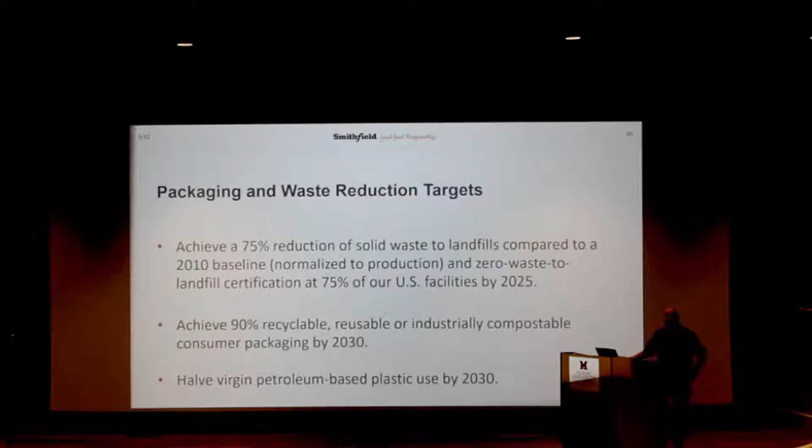We have others with food loss and waste reduction. We've got others with greenhouse gas emission reduction. We've got huge programs for a lot of different things, but we're going to talk about our zero waste to landfill program today. So how do you get there? Like, what's the process? What does it mean to be zero waste to landfill?

So we define it internally that you don't send anything to landfill for 12 months in a row. So it can't be just 1 month and go back to putting stuff into the landfill. It's got to be a sustained program, and we audit it every month, and we make sure that we fulfill that. Minimum 10% reduction in total waste from our baseline, recycle or reuse greater than 50% of the waste,

and the total cost basically has to be cost neutral. It can be a little bit above, 5% above what the baseline cost is, but effectively it has to be cost neutral. So, when did we start this whole thing? We started basically out in 2012. We came up with the thought process of having one zero waste to landfill facility by 2018.

And this is actually in Peru, Indiana. So anybody from Indiana? Couple, there you go. So that's great. And so Peru is just north of Indianapolis, north of Kokomo. And they took the initiative and became our first zero waste to landfill facility.

And then after that, again, by 2018, we wanted one. We had 12 facilities by 2018. And right now we have 21 of our 45 or so operating facilities, 50 if you include distribution centers, zero waste to landfill. So we're really making a mark, you know, relative to our peers in the industry. Yeah, we're miles ahead of them.

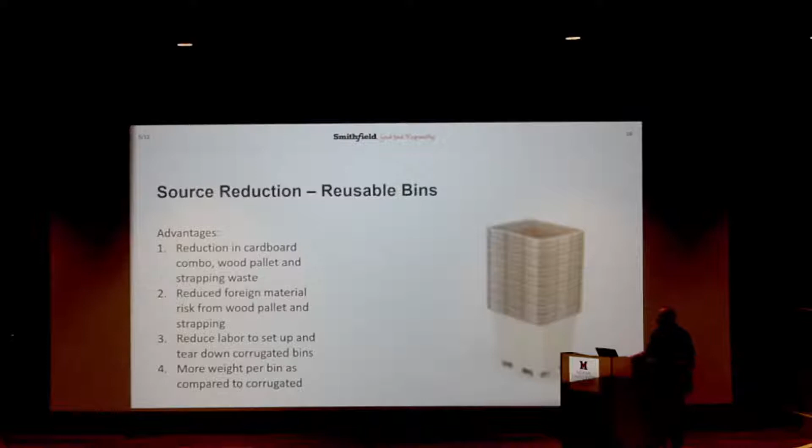You don't need the strapping around it. So it's fully self-contained. And then the other part of it is make it easier for people to do the right thing than the wrong thing, right? To put it in the right place to be recycled versus putting it in the wrong place and have it go to the landfill. So we try to do that at our operating facilities throughout the US, and again, we have it in different languages, right? And we have to try to do pictures, and we have to have receptacles for it to go the right way. So this is just a picture.

We're going to go through a couple pictures of kind of the things that we do. And cardboard is huge because, again, for that cost effectiveness deal that we've got going, it's got to be cost neutral, you know, plus or minus 5%. This is a huge way of getting there. Cardboard, especially baled, goes for about $150 a ton.

And so if we can effectively take any and all cardboard that was going to the landfill, bale it or put it into a compactor, sell it as a product, get $150 a ton for it, right? That funds a lot of the other things that we need to do that cost money to get to zero waste to landfill. So this is our funding source, and we got to make sure that 100% of our cardboard actually does get recycled and none of it goes over into the bin that goes to the landfill.

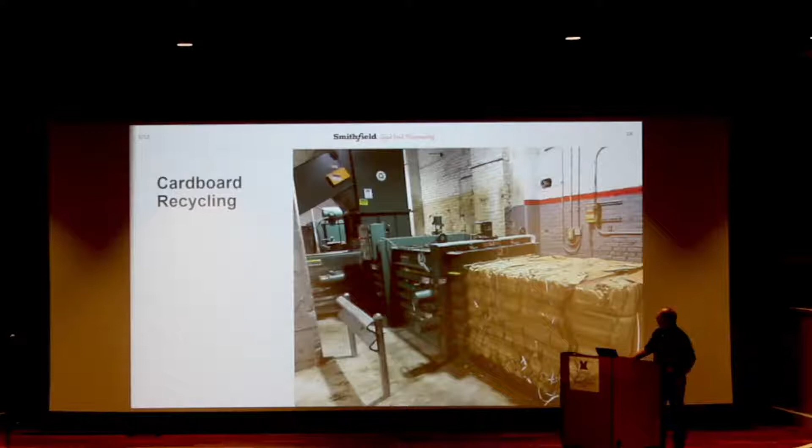So metals too, metals, especially stainless steel, is astronomical price-wise. You get a great rebate for metals. And so we got to make sure that we recycle 100% of our metals and actually separate out the carbon steel from the stainless steel, right? Because you get a better price for stainless steel than you do for carbon steel. So again, that's a revenue source, and we got to make sure that we recycle our metal.

And wood scraps, again, we're trying to get rid of it at all of our operating facilities, but right now we still have some, and you can send this to a chipper and it can go to a compost facility. We have programs with pallet suppliers, where if there's a broken pallet, they'll take it back, they'll repair it, and then they'll bring us new ones. And so we try to recycle and reuse our pallets as well.

And then plastics recycling, this is kind of one of the tough ones for us. They will take clean, like LDPE, low density polyethylene. It's a type of plastic that people like, but really they don't give you a whole lot of money for it these days. And so it's tough to recycle plastics, and especially what we call protein contaminated plastics. And so if it's got a little bit of purge or blood on it, just nobody wants this stuff.

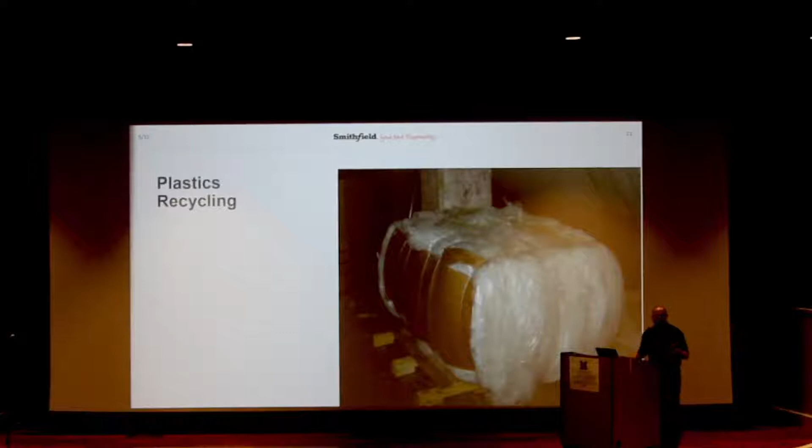So then this is a kind of a cool thing that we do. And we started this actually in 2012 as well. We take a lot of our wastewater sludges that are organic in nature, and we land apply that. And so the farmers love it. Actually, it's a free organic fertilizer for them, and it's a soil augmenter. And this is something that we do actually throughout the United States.

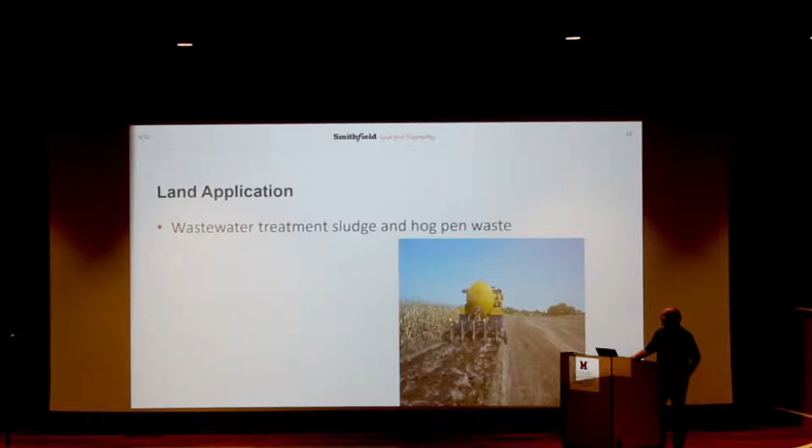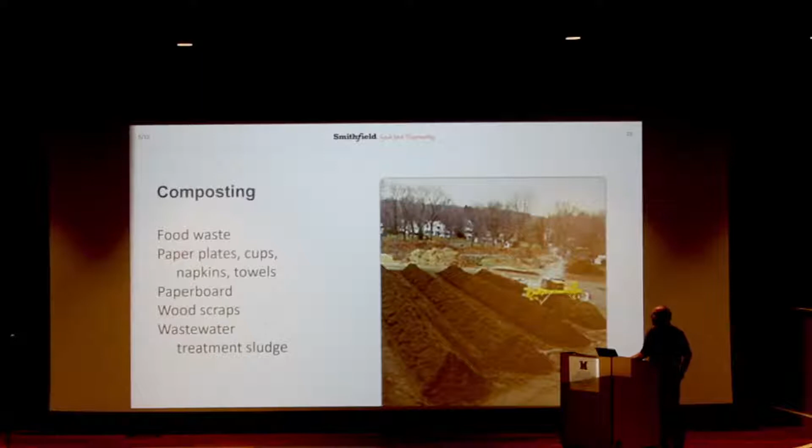Okay, composting is another part of what we do also. Food waste, paper plates, basically just, again, anything kind of organic can go to a compost facility. Anaerobic digestion, this is really interesting actually, because again, this gets into our greenhouse gas reduction process. We can generate renewable natural gas off of anaerobic bacteria that then generate biogas that is mostly methane.

You strip out everything that isn't methane, and you can inject that into a natural gas pipeline as renewable natural gas. And it's worth about 20 times what normal natural gas is. So this is a big money maker for us. We're spending millions and millions of dollars, actually close to $500 million, on covering up anaerobic lagoons that are at our hog farms and our operating facilities, and again, generating this biogas that then becomes renewable natural gas. But we can take some of our organic waste to these as well.

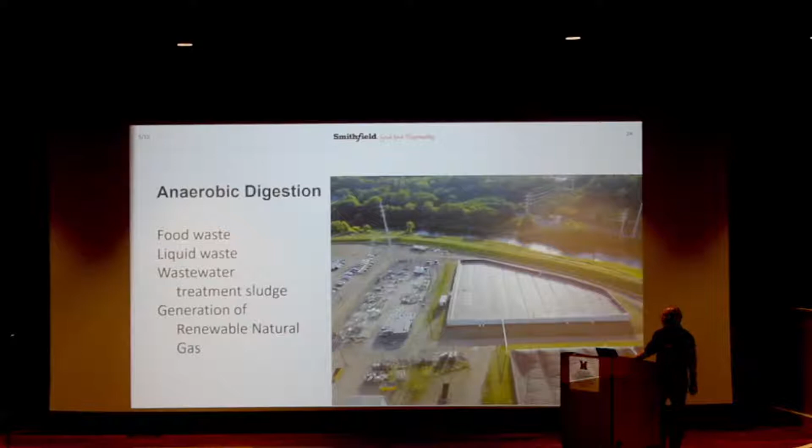So there's commercial anaerobic digesting companies as well. So even if we don't have a farm or an actual facility that has a digester there, we can actually take it to a commercial anaerobic digestion process. And then last but not least, for everything else, and that's typically only like 5-10% of our overall waste product, typically it has to go to a waste to energy facility.

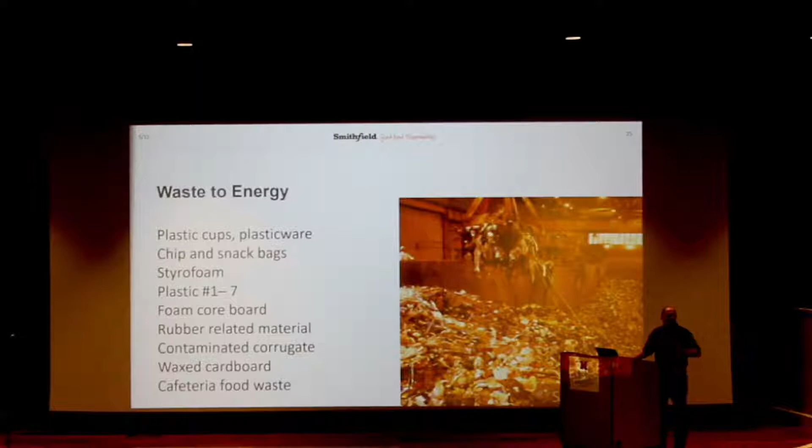And what that is again, instead of a landfill, you burn the trash and you generate electricity off of that. So there's commercial folks around the United States that do that as well for us again, but we try to recycle everything and minimize this because this costs a lot of money, a lot more than it costs to send stuff to the landfill.

So South Dakota folks, anybody from South Dakota? Nobody from South Dakota. Well, this is our Sioux Falls facility. It's one of our largest, second largest next to Tar Heel, North Carolina. And I just wanted to highlight a couple things that they do.

It's huge. They employ over 3,800 people at this one plant. It's 105 acres, 2 million square feet of operating capacity at this location. They harvest over 20,000 head a day there, produce 1.6 billion pounds of product, and purchase and use a little under 2 million gallons of water a day. So it's a very, very large facility, sits on the Big Sioux River that runs around it.

And some of the things that we did, again, started in 2012. This is a program where all of our wastewater sludges were going to the landfill. And I went, gosh, that's not the right way to do this. And so we partnered with a firm that helps us out and finds farmers that want this material, and will transport it over to these locations. And then when the crops are out of the fields, once in the spring, once in the fall, we do land application.

And again, for us, 2.4 million pounds a month used to go to the landfill and is now going as a soil augmenter and a natural fertilizer to fields around northwest Iowa. So that's a big thing. And again, cardboard recycling, they do a great job. Almost 600,000 pounds of cardboard is recycled from this facility every month. It is staggering, right?

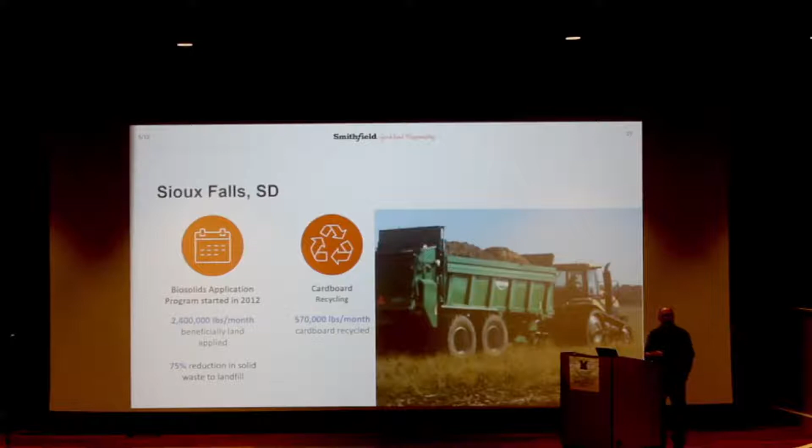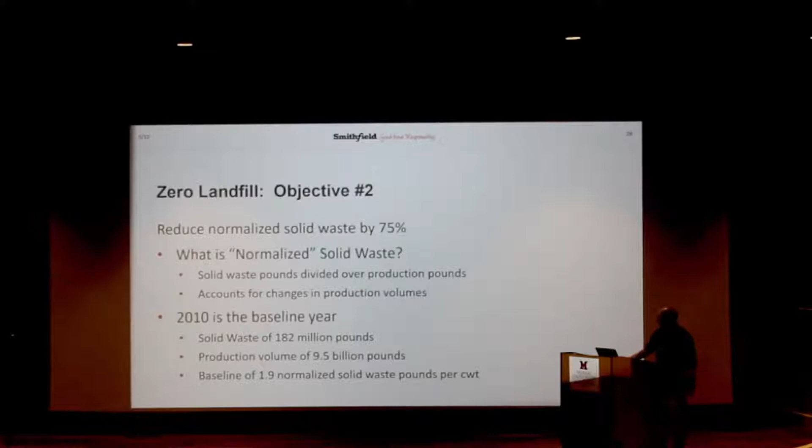So we do have a second objective, which is on a normalized basis, to reduce the amount of tons of solid waste going to the landfill by 75%. When production increases over time, you generate more waste, so we have to normalize that. Our baseline was 2010, and we sent 182 million pounds of solid waste to the landfill. It's a lot, right? But that was based off of a production volume of almost 10 billion pounds. So a baseline of 1.9 normalized solid waste to the landfill per 100 weight of production.

So the benefits of the overall program are huge, right? Landfills have a set amount of space. I know you guys have been looking at the Rumpke landfill. I just went by that facility on my way up here today. We know the Rumpkes. I talk to Adam Rumpke all the time. He's a good partner for us. And they do nice things on recycling as well.

But to the extent we can, we're going to eliminate landfill use, find beneficial reuse of waste materials, cost savings initiatives, like I mentioned before. Oh, by the way, that land application process up in Sioux Falls saves at least $600,000, $700,000 per year for that one facility by taking what was going to the landfill and sending it to land application. So it's a huge cost savings initiative as well.

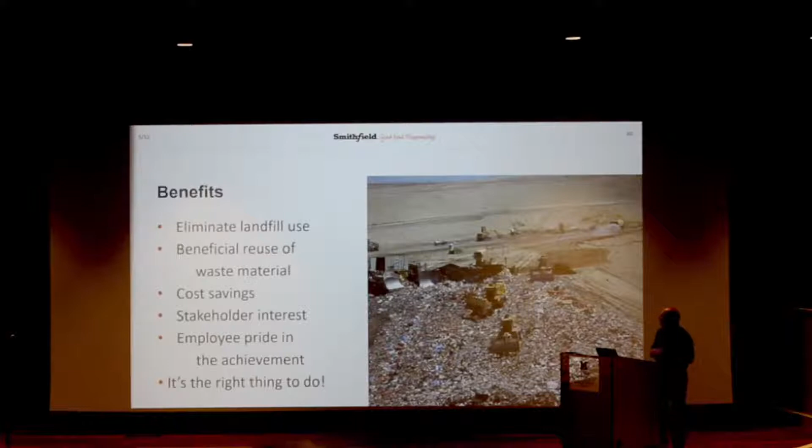So that's stakeholder interest, and then just employee pride in the achievement. I talk to these facilities that are zero waste to landfill, and I'll talk to folks on the production floor and throughout, and they really think it's a great thing. So they're very, very proud on an individual plant basis for being zero waste to landfill, and they think it's a cool thing that we do for Smithfield. So they have a lot of pride in it. And again, it's the right thing to do.

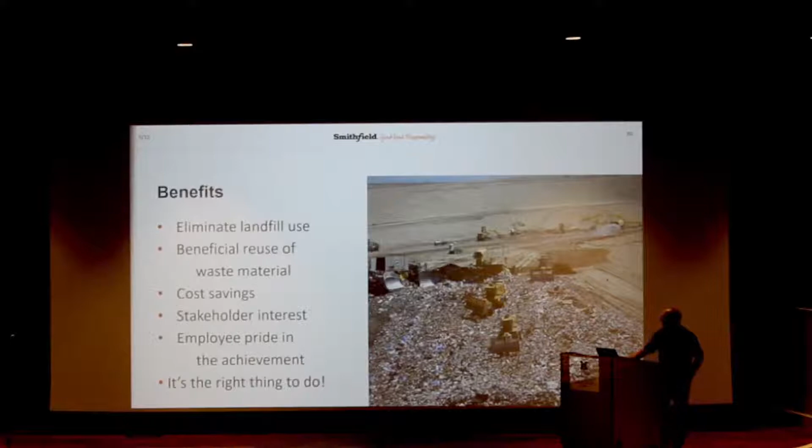So that's what we have on zero waste to landfill. And I hope you enjoyed it.

As you can see from the depiction of the topographic map, the red line is our road path, the green line is the landfill site, the black dot is our parking lot, and the yellow dot is the new landfill entrance. So for context, the bending lines are ridges and valleys, the looping lines are summits, the contours that are far apart are gradual slopes, and those that are close together are the steeper slopes.

So we decided to construct our road along the contours in a way that minimizes transport over really steep slopes and maximizes transport over flat, low-lying valleys. This will allow smoother transport, allowing more trucks to enter the landfill on a day-by-day basis. And also, we constructed it in a manner that avoids interfering with the native mounds, which helps preserve the vibrant

cultural landscape. Since Eden soils are very steep, most of the road, along with the entire parking lot, will be constructed on the Switzerland soil, which is much flatter. Also, to address frost action and the shrink swell potential limitation, we could minimize this by compacting the soil directly underneath the road, which was recommended by Jessica Burns, a soil conservationist of the NRCS.

And by compacting the soil directly underneath the road, we will also be increasing the soil strength by enhancing the bulk density, which is essentially dry weight over volume. And since all the soils in this area where the road will be are well drained, we can plant vegetation roadside, creating roadside buffer strips, which will help to decrease runoff and erosion, which were two major limitations.

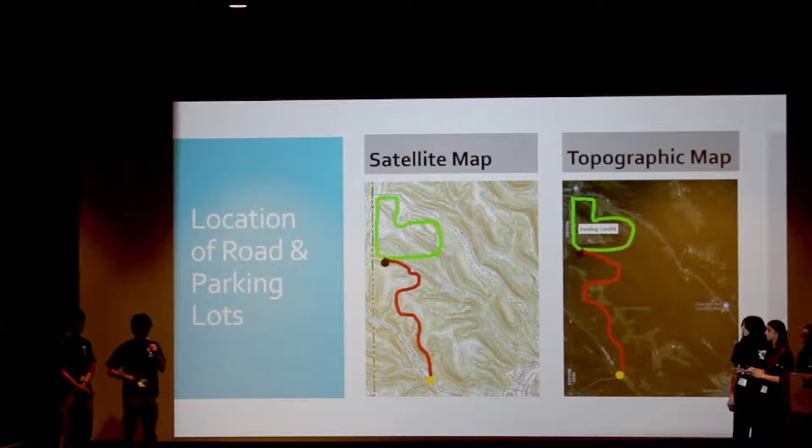And while this site has limited excavation potential, it's not too big of a deal for us because the soil the road is going over has too low of a clay content to be useful in stockpiling or covering the landfill on a day-by-day basis.

Okay, so I'm the environmental engineer and I'm in charge of landfill and site operations. We can use best management practices to make the construction and short-term use of the road more sustainable. Placing buffer strips of forest and vegetation along the road and streams will reduce soil erosion and runoff. To prevent sediment and dust pollution, which impact soil and water quality in nearby streams, we'll spray construction sites with water. Avoiding the use of heavy equipment during and after rain will prevent soil compaction.

Also, using recycled glass and asphalt and following the 4 R's of waste management, reduce, reuse, recycle, and repurpose wherever possible, will minimize the project's waste stream. Finally, we should reduce the area disturbed by construction to protect wildlife habitat.

To operate a municipal solid waste landfill like Bond Road, we'll need to follow regulations and guidelines set by the Resource Conservation and Recovery Act and Hamilton County's Solid Waste Management District. We should also implement long-term best management practices to maintain the site and protect environmental and human health.

The new extension currently being planned for the landfill will decrease the amount of leachate, which is water that trickles through the landfill and becomes contaminated by chemicals in garbage, that needs to be collected. However, leachate collection systems are still very much needed to remove it from the landfill to reduce the risks of it seeping through the liner and contaminating nearby soil and groundwater.

In the case any leachate does escape, groundwater and surface water monitoring should be done both upstream and downstream of Bond Road. Leachate can also be recirculated into the landfill, which not only reduces the amount that has to be sent to a wastewater treatment plant, but also decreases the risk of subterranean reactions.

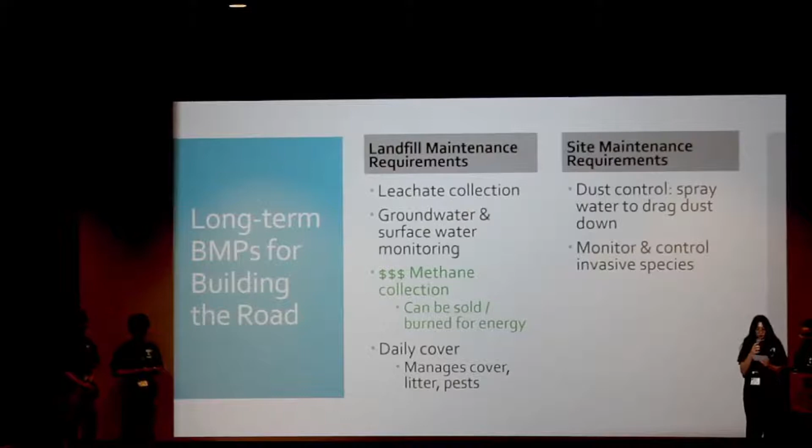Methane should also be monitored with wells and probes, as well as collected with pipes that go into the landfill. It can then be sold as a profit source to fund the road construction or other Rumpke projects. Another option for methane is to send it to an energy recovery facility to remove contaminants and burn it, producing electricity to power Rumpke garbage trucks, the landfill, or even nearby homes.

Additionally, with more waste coming to the landfill, a daily cover will be needed to control odor, pests, and litter. Odor can also be controlled by collecting certain gas byproducts of waste decomposition with wells and a blower, flare, or vacuum system. The site should also be maintained beyond RCRA landfill regulations. Again, any construction or processes that will produce dust can be sprayed with water to protect water resources.

Precautions should also be taken to manage areas of the site that have been disturbed by construction. According to Daniel Thompson, a wildlife expert, disturbed sites are easily overtaken by invasive species, so monitoring should be done to prevent the spread of species like bush honeysuckle or Callery pear. If the plants are small, they can be controlled with physical methods, and herbicides can control them if they grow too large.

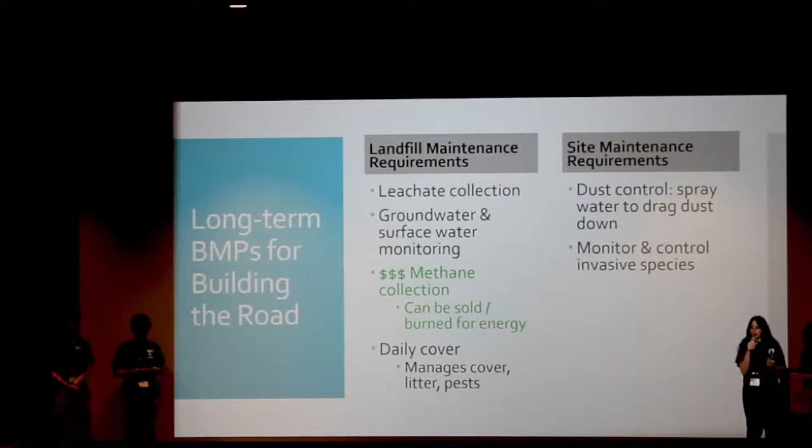As the environmental consultant, I'll be addressing measures that we can take to improve habitat, wildlife diversity, and aesthetics at the site once construction is completed.

First, planting a perimeter of trees around the site will reduce noise escaping to the community, hide unsightly views, filter air and runoff, and create valuable edge habitat for edge species like white-tailed deer and wild turkey. Further, these trees could be planted by volunteers or students as a community service or education initiative.

In these perimeters, native oak and gum trees should be maintained as they grow very well in southwestern Ohio, which has led to a concentration of oak gum forests in Hamilton County. Maintaining these oak and gum trees will lead to production of both hard mast in the form of acorns from the oaks and soft mast from the gum trees, which will attract a wide diversity of wildlife that consume both

hard and soft mast. In addition, spring ephemeral flowers planted around the perimeter and throughout the site will attract pollinators that feed on the flowers' nectar and pollen, creating very much needed pollinator habitats.

Another improvement we can make is turning the existing man-made pond on the newly purchased land to a man-made wetland, which has numerous benefits such as slowing runoff, allowing more water to infiltrate, acting as a sink for nutrients and pollutants carried by the water, and providing habitat for wildlife.

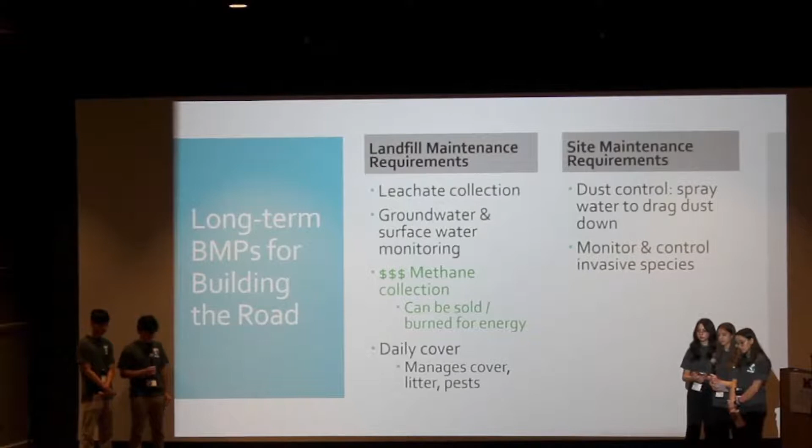So yeah, you did a very good job covering a number of questions. You did talk about the route you chose, but I wonder if you could speak a little more about the alternatives you looked at to this route, because I'm sure that was a prime consideration. Mm-hmm. So one of the major limitations was that there are a lot of very tall peaks. So we wanted to take the most direct route possible, but also avoid any super sharp turns.

So we originally tried going left, but then we found we're too close to the Indiana-Ohio border, so we would cross state lines, and we wanted to avoid that. And going right, there is the Fox Run River, so we wanted to avoid building over the river. So we thought it best to navigate through the summits and peaks and go through the valleys, and in doing that, it's a more direct route. We're avoiding state lines, and we're avoiding the river.

And also when we were planning, we noticed, looking at the soil map, that there was only really this one particular stretch of the land that we constructed our road into that did not have as severe limitations for building. So this also takes that into consideration and plans to build the road specifically on that stretch of soil.

Yeah, the strip we built the road on, the vast majority of it is the Switzerland Silt Loam, and that has far less limitations in terms of steepness, so we thought it best to build the road there.

Also, the main problem with the current entrance is that there's a very sharp turn, or many of them, that are hard for large garbage trucks to pass through. So in building this new road to increase utilization of the landfill, we really want to reduce the sharp turns and sharp high peaks that the trucks would have to go through so that they can carry more trash to the landfill and increase its efficiency and utilization.

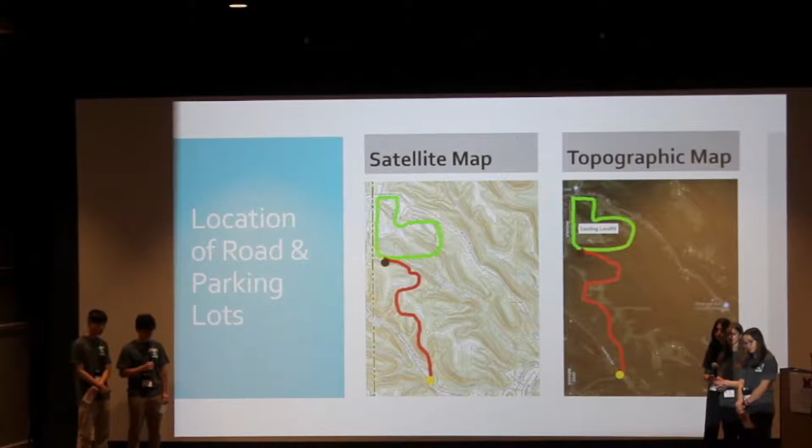Hi, your presentation has been wonderful. I do have a concern about the possibility of finding endangered bats and relocating them. Would that possibly cause more stress on their population and have a negative effect? And I'm also wondering if they might have a fidelity to a certain roost and they may want to continue to return. And I just wonder if your plan has anything that can consider that possibility.

Right, so I'm pretty sure it's well researched that bats, when they're relocated or when they're pushed away from their habitats, usually they're settling there because it's the most optimal habitat they could find. And in breaking up their roosts and their social groups, they split up, and so their roosting sites are less ideal.

Unfortunately, that is a problem that we currently have, but first we want to see if they're there, and if they are there, we will see, sadly, a decline in the idealness of the relocation of the bats, but unfortunately that is something we would have to do. Yes, and the first thing we would do with regard to the bats is follow all actions in line with the Natural Resource Conservation Service's bat conservation measures. So when doing our survey, we would do everything that we can to ensure that they are not disturbed.

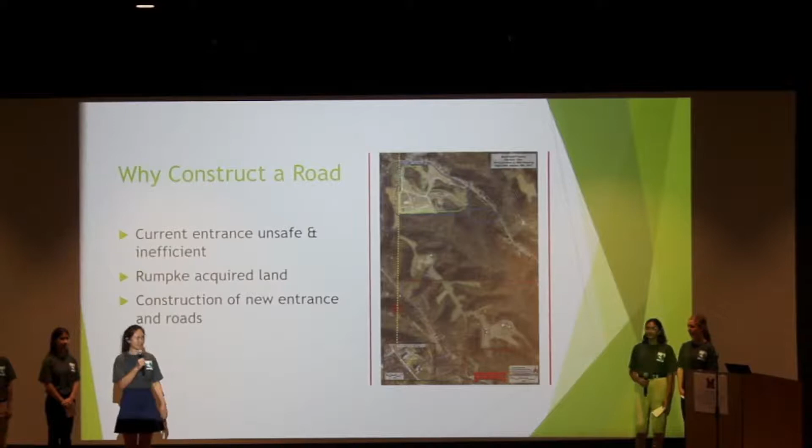Why construct a road? Here's the situation. Currently, your road is both unsafe and inefficient. After the acquisition of this new parcel of land, you'll be able to construct a new entrance and road to the landfill site, which is what we'll be helping you with today. Let's take a look at the site, shall we?

We recommend that you conduct the following land survey assessments. First, an archaeology and bat species inventory, then a wildlife habitat evaluation, an endangered species survey, including the historical site reportings, a soil survey and soil evaluations, and take a look at the demographics and the possible environmental justice communities in the area. From our research, we found that 96% of the population in this area are white, and that the median household income is around that of the national median income. Therefore, we believe that environmental justice is not a major concern for this specific area.

Next, Neri will introduce some key stakeholders and their concerns. Thank you, Robin. Obviously, y'all at Rumpke are a crucial part of the planning and construction process, but we believe that public input can be incredibly valuable and powerful at times.

Some of these concerns from residents in nearby towns can range from health and pollution-based to traffic and flood-based. For example, respiratory illnesses, cancer, and road salt contaminated water are all major public health concerns. In addition, traffic influx from garbage and construction vehicles will also come along with the expansion of this landfill.

Some other important interest groups that are worth mentioning are hunters and trappers in the area, some environmental groups such as the Solid Waste Caucus and Ditch the Dump, and native populations whose land this landfill is located on.

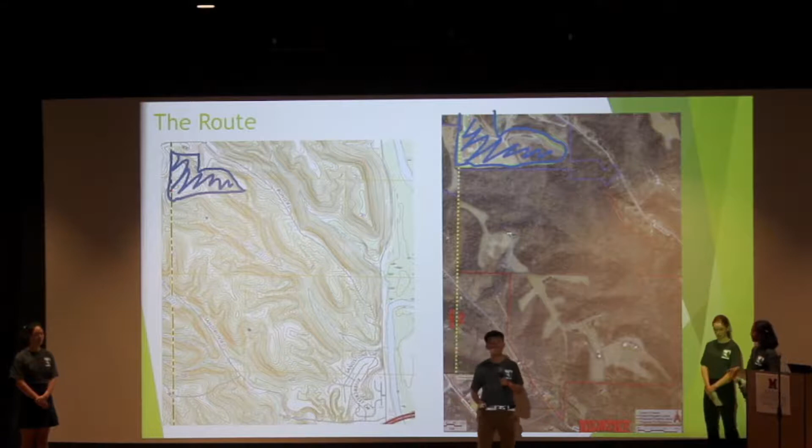So here at Greenway Solutions, we had three main considerations in creating your road. The first of these considerations is to minimize the amount of disturbance. The second of these considerations was to minimize and control the amount of water runoff. The third of these considerations is to reduce sedimentation, erosion, and slippage.

Here is our first section of road. In this first section, we wanted to distance ourselves away from Sand Run and allow for adequate setback. To do so, we have our road first run north before running to the northwest. This allows for some distance between our road and Sand Run and thus minimizes the disturbances.

Our second section of road goes straight up a steep valley, allowing us to better channel and control our water runoff. This valley has a concave plan, which means that all of the water that runs into this valley gets channeled straight to the center. If instead we had chosen to use switchbacks or gone along a contour line, our water would have dispersed everywhere and our runoff and pollutants as well.

Additionally, either of those two methods would have required a steeper and thus more erosive slope than the max of a 16.6% grade seen going up this slope. By using this natural valley, we help channel our runoff, and thus we can reduce the impacted area and better target our runoff to remove pollutants before it enters our surface waterways.

Our third section of road takes us up onto the relatively flat and pre-developed ridgeline, thus reducing the amount of additional disturbance required, the erosion potential, and thereby sedimentation. Furthermore, this tall ridgeline is underlain by silty clay and silty clay loam, a relatively more permeable soil than that of the adjacent areas, allowing us to better minimize runoff.

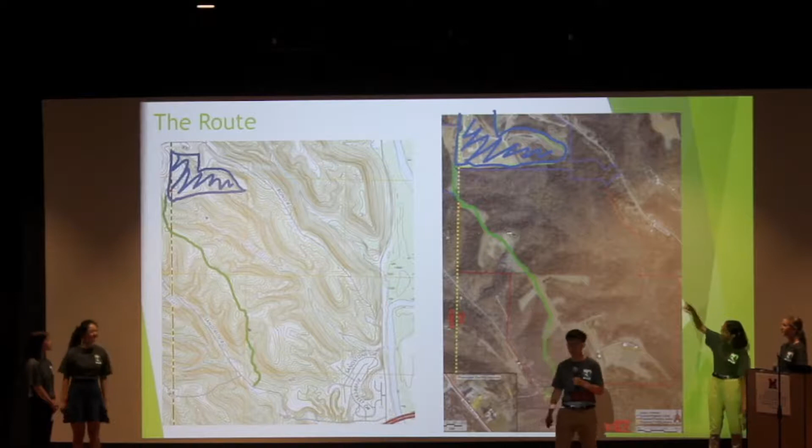Our fourth and final section of road traverses the flattest and least vegetated land to get to the current landfill boundaries. Now, I acknowledge your concerns that this does run very close to your western property lines. However, we believe that with appropriately sized filter strips, we can still uphold your goal of being invisible at the property line. We also noticed that this does go a little bit more to the northwest than what is direct, and this is to skirt around the headwaters of Fox Run to reduce surface water pollution.

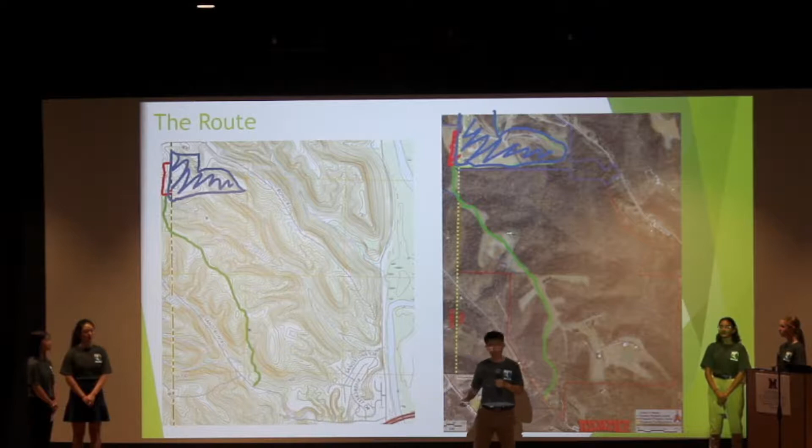Finally, we recommend that your parking lot be placed on the southwest side of the landfill. This area is the flattest and least vegetated, thus reducing disturbance and erosion. With this road plan in mind, Robin will tell you about the best management practices that we will use during the construction process to help our neighbors and protect the environment.

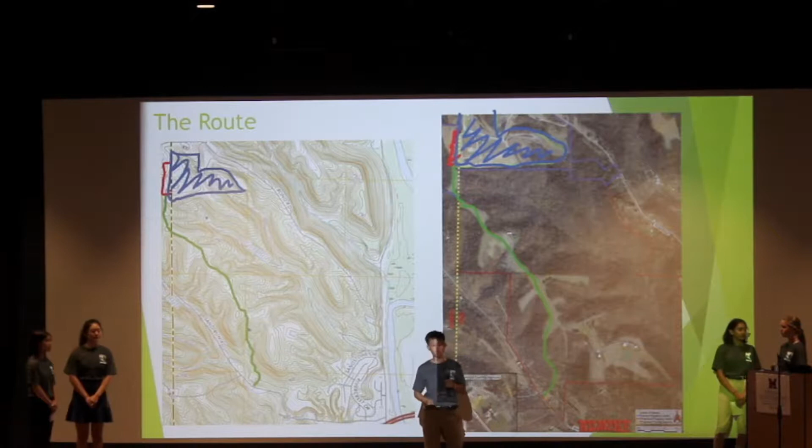We've prepared a series of short-term best management practices in order to mitigate the immediate effects of construction. First, we'll construct from uphill to downhill, and this will help reduce sedimentation. This is because sedimentation that occurs from uphill construction will be filtered out by the pre-existing vegetation downhill. We'll apply the same practice to any demolition, and also move any demolition waste along pre-existing roads in order to reduce soil compaction and reduce the amount of unnecessary access routes.

We'll also be working during working hours. That way we'll help mitigate any possible complaints about noise. Timing is key, and we plan on starting construction in early October. This helps reduce the risk of removing any important trees that serve as critical summer roosting habitat for bats.

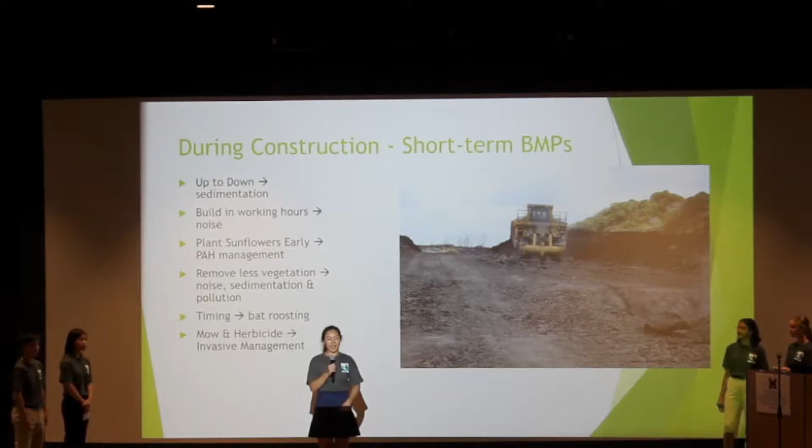We'll also be planting sunflowers to help mitigate the effects of PAH, a toxic chemical produced by asphalt, and maintaining as much vegetation as possible to reduce soil erosion. Next, Neri will talk a little bit more about how we're mitigating invasive species.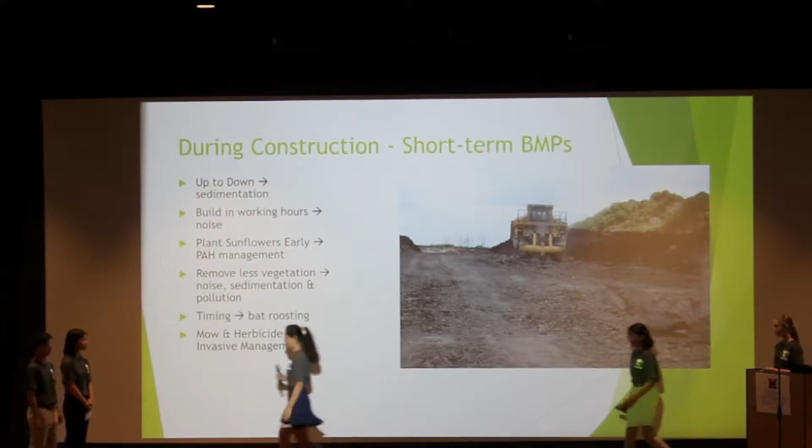To manage invasive species along the roadways constructed, we recommend mowing and applying an herbicide with a short half-life, such as triclopyr, on these cleared areas in order to prevent any hidden or dormant invasives beneath the soil from taking over these roadways after a disturbance event.

We recommend using an herbicide with a short half-life because that allows the herbicides to get decomposed and broken down in the soil much faster, so we can start planting native grasses again. You could also plant Indian grass or an endangered buffalo grass as phytoremediation techniques to remove trace herbicides and detoxify the soil.

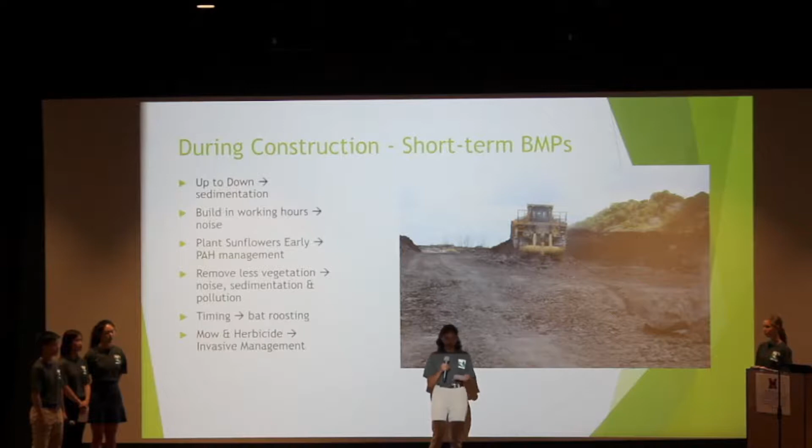So now moving on to some more long-term BMPs. How did we engineer our road to help you guys in the future? So we had 3 main goals going into this. First of all, we wanted to protect your road surface. Second of all, we wanted to minimize the amount of runoff. And third, we wanted to prevent any wildlife and vehicle collisions.

To do so, we recommend that you establish a high crown yet impervious road surface. While we considered the implementation of permeable pavement, this is not the place to do it. The high shrink swell potential of the underlying clay soils would result in high stresses to your roadway every time it rained and dried, meaning that your roadway would have needed frequent repair.

Instead, by implementing an impervious yet highly crowned surface, every time it rains, we can divert that water off the roadway into our lateral infiltration ditches. In these infiltration ditches, we will place perforated pipes to direct this runoff away from our roads and into the adjacent vegetation and soils to reduce runoff.

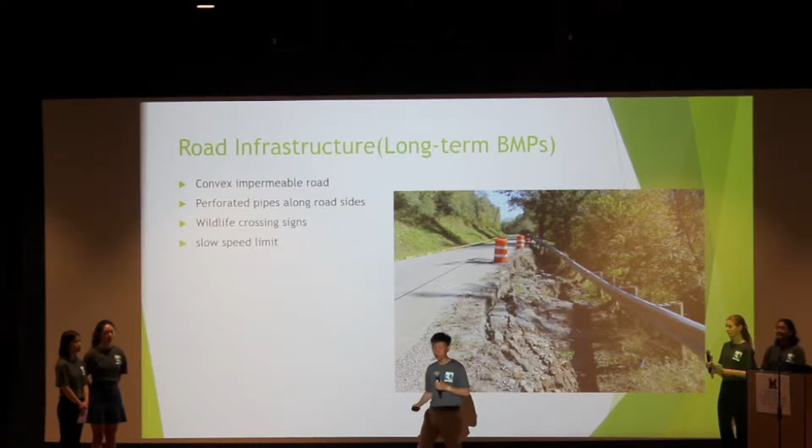To prevent wildlife collisions, we recommend that you keep this roadway at a max of 15 miles per hour and place wildlife crossing signs wherever appropriate. With this in mind, Caroline will tell you about salt application on your roadways.

One way to reduce the negative impacts of road salt on our soils, forests, and waterways is to mix the salt with beet juice. As crazy as this sounds, the beet juice gives the salt a distinct color, so when applying, it's very easy to tell where it's already been applied. So appliers can easily tell where it's been applied and avoid reapplying that same area, thus avoiding over-application.

Another strategy we can use is to apply a thin layer of sand to the road. Sand increases friction, increasing traction, and reducing the need for road salt. These strategies have been applied in many areas across the US and have been extremely effective at drastically reducing the amount of road salt in our streams and waterways.

We'll also be implementing buffers throughout the site. These buffers have a variety of important impacts. For one, the vegetation helps hold the soil in, thereby reducing soil erosion and sedimentation. They also add organic matter to the soil, which has a lot of benefits. It improves soil structure, improves water retention, and improves infiltration.

These wooded buffers will also help as a barrier to noise, which will both address community concerns about noise and also help reduce disturbances to wildlife. They also act as important wildlife habitats and serve to add to the aesthetics of the site, because who doesn't love looking at trees? Next, we'll be going into all the different buffers and where they'll be located.

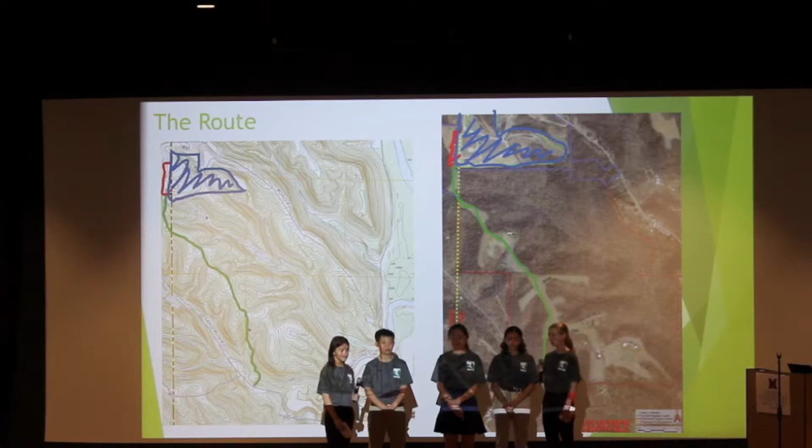I got another question, maybe. Just downstream from Fox Run, I remember seeing on the map, there's a kind of a development, and then in addition, not too far away, there's a school. To what degree did you think about your messaging special to those communities that are just downstream or more sensitive, like schools, tend to be more sensitive when you're doing things like landfills? Had you given that some special outreach thought, and like what your outreach plan would be?

Yeah, definitely. We would have some outreach programs, and we want to educate the schools and the people nearby about the risks of living near a landfill, but also we can reassure them about how conservation buffers and our best management practices will help protect them from potential contaminants in landfills running into their residences. It's also a great opportunity to teach about pollinators and wetlands and all the wildlife and plants that live here, because of all of the natural habitats we have implemented. One consideration that we had was to establish a walking trail up along the side of our road, because we already managed for the infiltration.

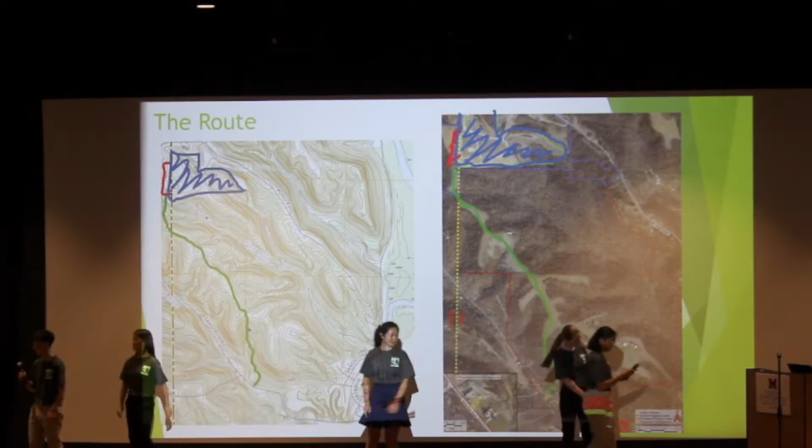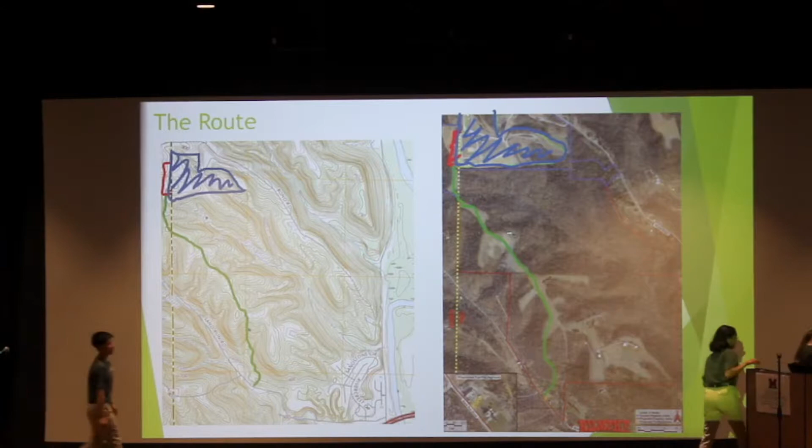Okay. Sorry about that. Thank you for the questions. Oh, thank you guys. Whoa. All right, everybody keep your seats because I think our next team is ready here. So just give me a minute. All right, everybody put your hands together for team 2222. Okay. We are Team 2222. I am Sienna. Can we start? All right.

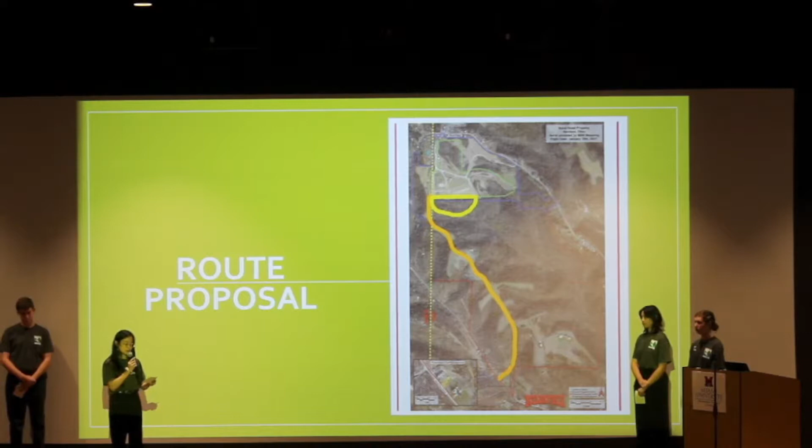However, these 3 problems can all be remediated by adding components to the soil. We suggest specifically adding calcium carbonate or lime, as well as sand to remediate the low strength of the soil. Unlike the other sites on this region, we do not have to contend with slope. As you can see, it's at the top of the ridge. We do not have to contend with slippage, and we do not have to contend with flooding by using this location. Moreover, since this region has already been deforested, we will have limited soil disturbance and deforestation necessary at this site.

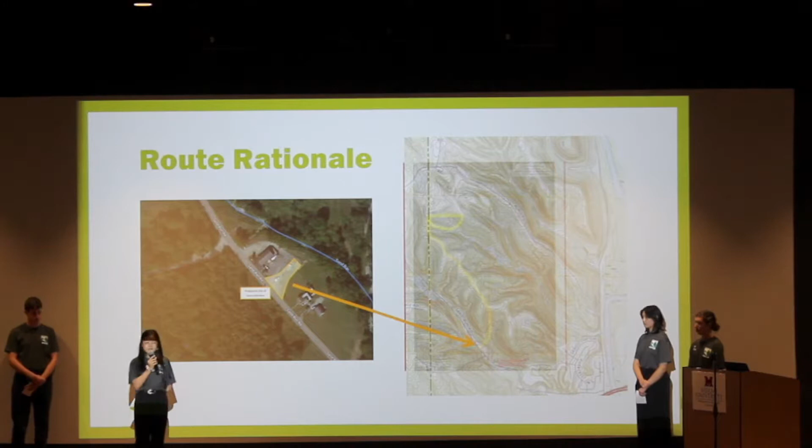And finally, you can see that the region marked in yellow is the projected expansion for the Bond Hill landfill, and this will allow us to access that expansion once it is constructed. Now I will pass it off to Josh to talk about our best management practices.

Before we begin construction, there are a few surveys that we need to complete in order to ensure that this is a viable place for the road, parking lot, and entrance. First, we have used soil data from the National Cooperative Soil Survey to craft this management plan. However, we have not gone and sampled the soil in person, so we would definitely recommend going on site to the location to sample the soil to determine its composition and suitability for these management practices that we recommended. For example, Lena mentioned some issues like low strength, and some of these can be remedied by adding chemicals to the soil. However, we don't want to add these unless it is absolutely necessary.

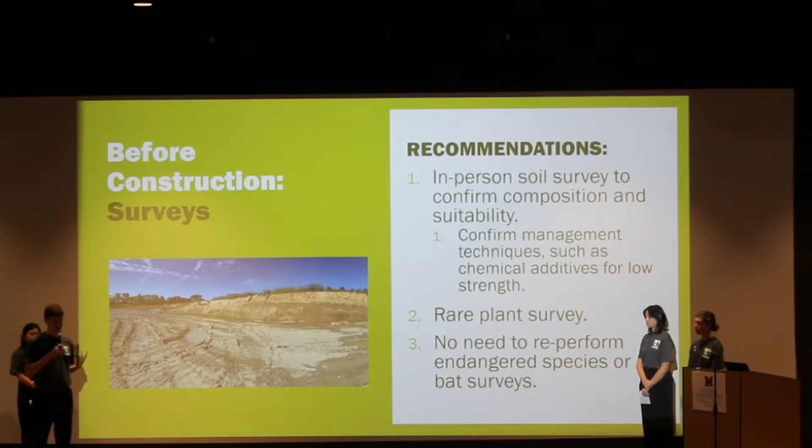Second, we need to conduct a rare plant survey to determine if there are any threatened or endangered species in the area. And if there are, we may need to modify or alter our plans because we want to leave these species in their habitat to ensure their longevity. Third, we have been informed by Rumpke that they have already completed the endangered species survey and the bat survey and found that there were no endangered species nor bats in the area, so we do not need to reperform those. And as of now, the site is viable for building our road, parking lot, and entrance pending the results of these other surveys. Connor?

In addition to the ecological surveying that Josh has mentioned, we also need to maintain compliance in terms of the preservation of our cultural resources. In this case, pertinent legislation at both the state and federal level includes the National Historic Preservation Act, which necessitates that all federal agencies prioritize the conservation of our archaeological sites during projects that require the excavation of soil, which in this case is necessitated by the fact that we are building a road. Due to the procedure being started by the excavation, the Ohio State Historic Preservation Office is also concerned, and they necessitate that a comprehensive cultural resource survey must begin before any actual construction or excavation on site begins.

As there is not strong historic precedent for the finding of archaeological sites in Southwest Ohio, specifically Hamilton County, we did not find any archaeological sites in the preliminary surveying, but in the event that further archaeological sites are discovered as we begin to excavate, workers and the excavation would immediately stop, and then the Ohio State Historic Preservation Office would be consulted before any further actions are taken. A process called mitigation would begin, where those artifacts are taken off of site and preserved so that we may account for the indigenous cultures that occupied this land before we are using it now. On to Sienna.

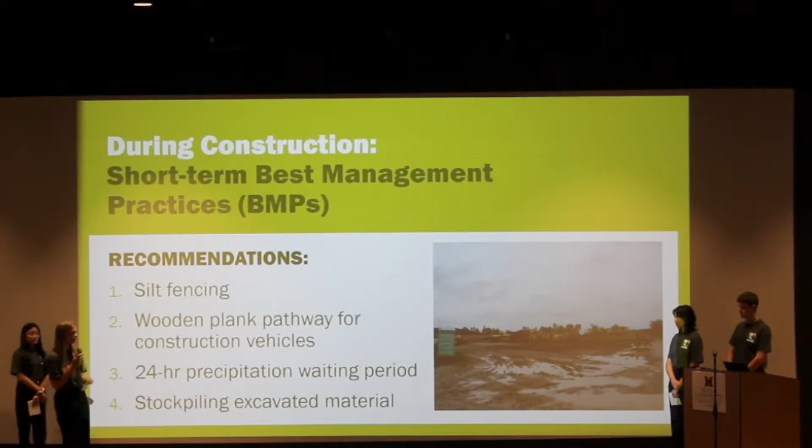So leading into the actual construction stage, we want to consider the impact that the building process will have on the surrounding environment and habitats. Prior to laying the road, we would like to construct a wooden pathway adjacent to the proposed road area. This will allow for construction machinery and equipment to travel up and down the proposed road area, which will then not track sediment back onto the already built road that can then wash off and lead to sedimentation in the nearby Sand Run tributary.

Additionally, we would like to add silt fencing to either side of the construction zone. This will prevent sedimentation from being washed down, and again, contributing to sedimentation in the nearby Sand Run tributary. And lastly, we want to implement a 24-hour waiting period after heavy precipitation events. This way machinery is not going over wetted or dampened soil after it has rained, and then the soil will not compact, which would then degrade the soil's draining qualities.

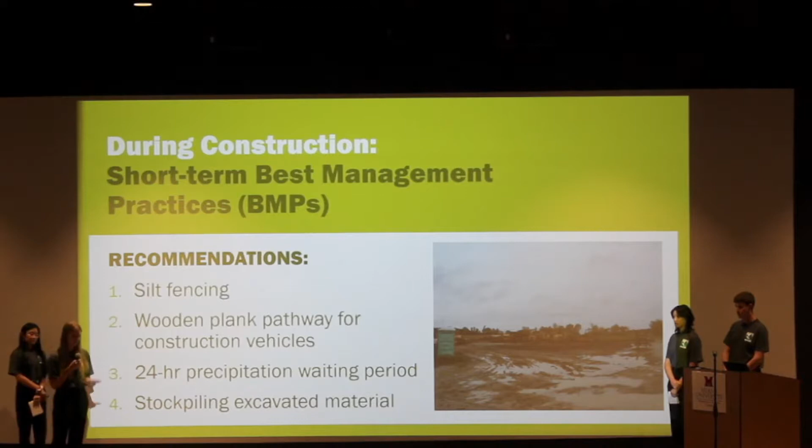And lastly, the soil that we excavate from the construction site, we would like to stockpile that for future Rumpke operations. So this can include building additional landfills, lining them, or the top layer of soil that is required when a landfill is inactive. And I will pass it to Connor. Oh, sorry. Education and outreach.

So we know that there have been many community concerns about Rumpke operations in the past, and we would like to take into account the local demographics and include the community in this process. So town hall meetings and local paper publications will be used to publicly state the results and updates of monitoring and testing that is done by the company Rumpke. And we would also like to try to battle the misinformation campaign that is currently online by establishing Rumpke's own personal online social media platform.

This way it can give information directly to constituents and therefore try to dispel any untrue claims that are ruining Rumpke's reputation. With this, we can help build a sense of transparency and a trusting relationship with the community, by them knowing that we are also taking their interest into consideration along with the environmental impacts that the company may have. Connor?

One of the main concerns that was voiced by nearby residents through the voice of the Cincinnati Post was the issue of flooding near the Sand Run entrance to the proposed road, and the fact that that flooding may be contaminated with runoff leachate from the landfill. So first we must understand what leachate is.

Leachate is the byproduct of when rain falls on top of a landfill and then percolates through the profile of the landfill as it goes, picking up hazardous organic materials and heavy metals, which by the time the leachate is fully formed at the bottom of the landfill, would then be too hazardous to emit back into the environment for fear of damaging natural soil and water resources.

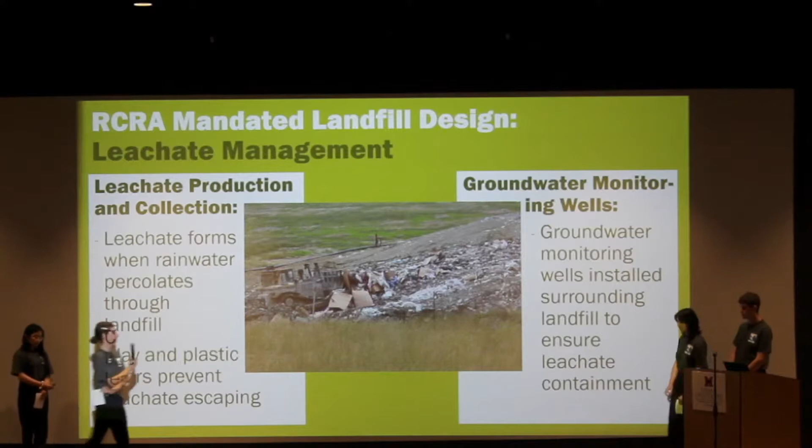So as Connor mentioned, community and groups like Ditch the Dump believe that our newly constructed entrance is responsible for the increased flooding in the area. However, engineers have confirmed that this increased flooding has nothing to do with the entrance. So it seems that the public and professionals are on different pages.

We recommend planting poplar trees around the new road entrance and in the surrounding area, as poplar trees have extensive root systems that can absorb excess water to reduce flood volumes and can also absorb petroleum hydrocarbons coming from the trucks that are going up and down the roads to decrease the pollution. And this also solves the issue of frozen roads during the winter time from the increased flood volume. So we will be able to improve safety for road users and Rumpke employees.

And by addressing the frozen roads during the winter, we can also reduce the amount of road salt used, so we can prevent pollution from sodium and chloride contamination. And of course, we hope that by addressing the flooding issue, we can build a more trusting relationship between Rumpke and the community. Mina?

Just beyond the entrance of our projected road is the Sand Run tributary, which is home to many wildlife. And so that road will actually cut through the wildlife habitat, and we fear that this may cause wildlife habitat fragmentation, where the populations on either side of the road are separated and unable to interbreed, limiting the genetic diversity of the populations and thereby making them more vulnerable to becoming either threatened or endangered.